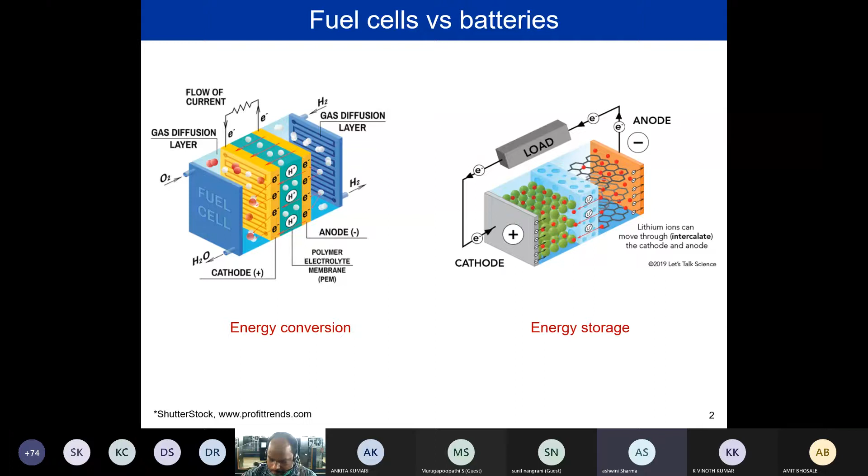If now I think of the actual applications, maybe hundreds of volts are required. Similarly, we require a lot of power to drive the real application. So then what we need to do in case of the fuel cell, we have to stack them, right? So here a single cell is shown, and a stack is shown here. This can be a bipolar stacking, or there could be some other architectures also for stacking the fuel cell.

Similarly, on the batteries, we have multiple cells. A single cell definitely will not be sufficient for our application, so we need to put a lot of cells together. I think Prof. Akhil has talked about this regarding battery module design and battery pack design. We have to put a lot of cells in series and parallel to make the battery modules and packs, and that's how we can really power the real applications around us.

So for both fuel cell and battery, we have to go all the way from the electrode level to the application level, and there are a lot of engineering challenges in between. It is not sufficient to work only on the material level or the electrode level. Rather, a lot of system engineering is required when you take a single cell to the application level. That is another interesting research area people are working on.

Now the focus of this presentation is the applications. When we think about an application, there are two major quantities: one is the power and the second is the energy. How much power do you require for a particular application? How much energy do you require? So what is the difference between power and energy?

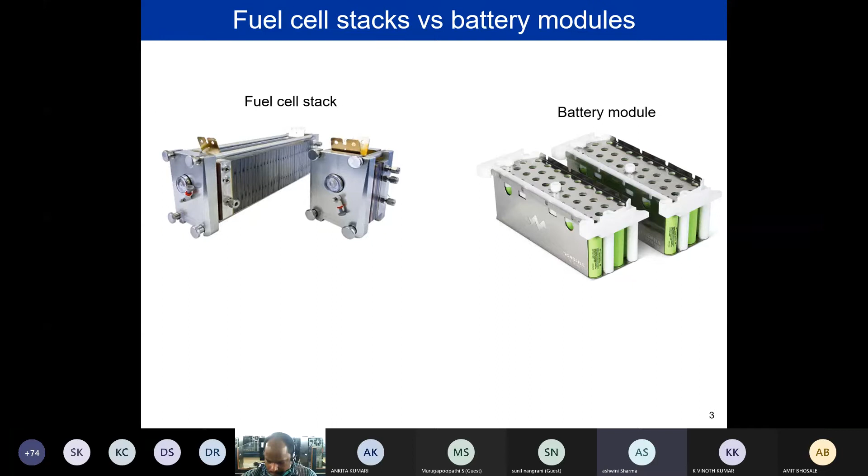Let's take the basic definition of power and energy. Energy means capacity to do work, the total capacity to do work. And power is the rate at which the work is done.

In context of, say, an electric vehicle, the total distance that the vehicle can cover will translate into the total amount of energy required. How much total energy you should have on board to go up to a certain distance.

Similarly, power comes into play because you need to accelerate the car. How much acceleration you can achieve in a minimum time gives you how much power you should have.

Now in terms of fuel cells and batteries: in context of fuel cell, energy means the amount of fuel that you have stored on board. In context of batteries, it is the amount of storage material you have.

Power means how much surface area is available for electrochemical reactions. Electrochemical reactions are surface reactions, so if you have higher surface area, higher current can be generated, and that's how you can convert it into more power.

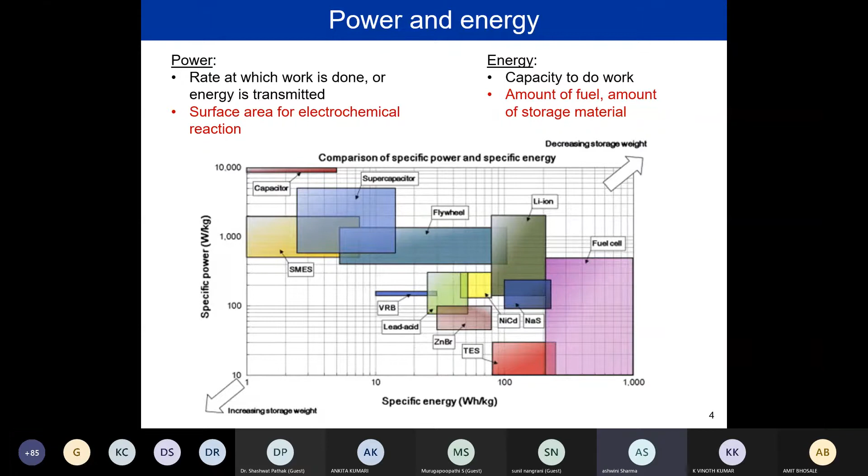Now coming to an application, if I want to run an application for a longer time, I don't need a larger stack. Rather, I simply need a larger tank, right? So there is no dead weight here. No dead weight will come up if I increase the energy. So that is the beauty of fuel cell.

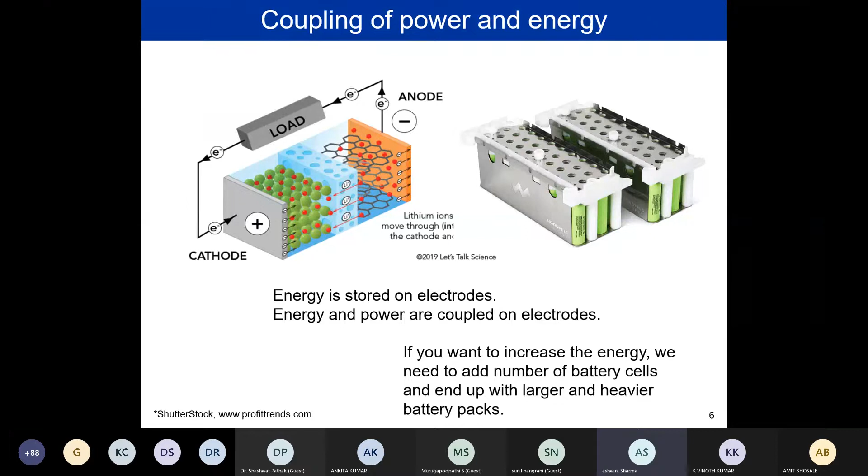I hope this discussion is enough for now when we are going to the application level. So let us think about what applications we can think of for these power sources. Definitely, whenever we think about these electrochemical power sources, the first application that comes to mind is electronics, your phone, your laptop. All these portable electronics require a power source, and the electrochemical power sources, especially the batteries, fit in very nicely, right?

You come to portable power tools. These kinds of tools are required maybe in industry, maybe in your garden, in your household tasks. Not always will you have electricity at your disposal. So in that case, maybe battery and fuel cell can do the job for you.

And if you come to defense and military applications, both fuel cells and batteries are being used or explored for applications such as portable systems, small vehicles, communication in the military, marine applications, for example, submarines and other underwater vehicles. Similarly, unmanned aerial vehicles. All these applications we have.

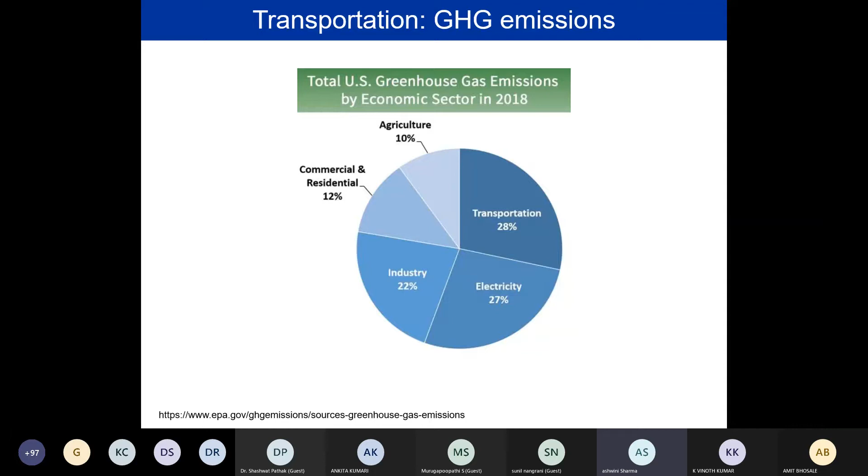So now comes a very important question. We think that electrochemical power sources, both fuel cells and batteries, can jump in for transportation. But the most important question is: fuel cells or batteries, which one? Companies like Honda, Hyundai, Toyota are producing fuel cell vehicles and also battery vehicles. In short, I will call one the fuel cell electric vehicle and the other the battery electric vehicle. Which one should we choose, FCEV or BEV? That is the question of the hour.

All these automakers are actively working on these vehicles, but there is no agreement on whether we should go for FCEV or BEV. Some prefer battery electric vehicles, while others think hydrogen fuel cells are the champion for zero emission transportation. So that is the question.

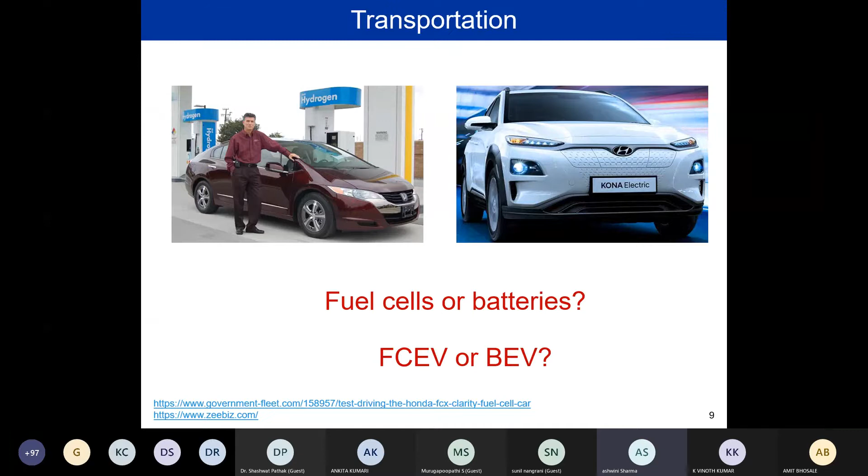Now let us explore both modes of transportation, battery and fuel cell, starting with well to wheel. The well is our crude oil source, the crude oil wells, and from there all the way to the wheels.

So gasoline is taken from the well, and then we are refining the gasoline, and you are converting it to suitable fuel, going into the fuel filling station, and then it is coming to the fuel tank of your car, and finally it is converted to rotational energy for the wheels. That is happening in the internal combustion engine that we are currently driving.

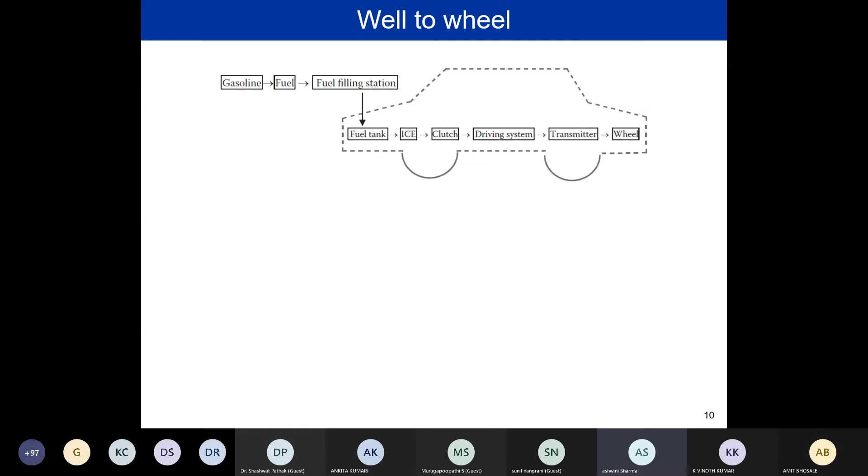Now what will happen if I have an electric vehicle? So let's start with the battery electric vehicles. In the battery electric vehicle, we will definitely be starting with some form of energy. Currently, the electricity that we are using in our homes is being produced by gasoline or coal, right? But in the future, we are thinking of renewable energies: solar, wind, hydro, atomic.

So here, once we have the electricity, in the case of the battery electric vehicle, we simply put in the charger and the energy is stored in the batteries, and later we can use it for driving the vehicle. So it has a simpler structure as compared to fuel cell.

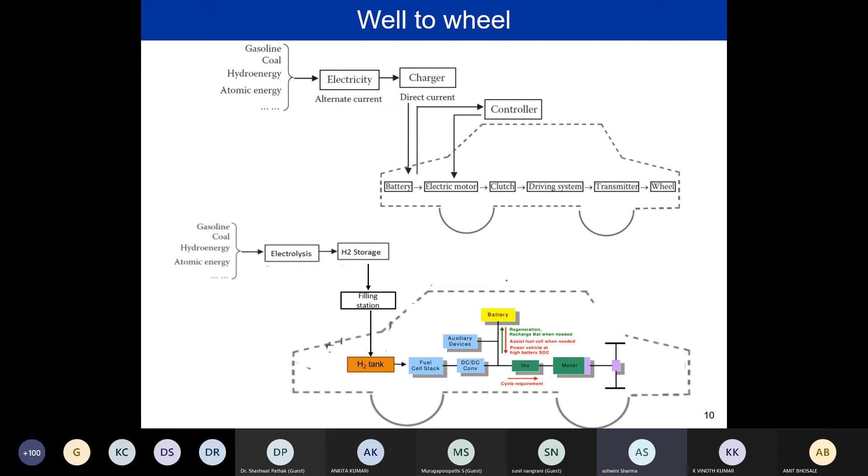If you see the fuel cell, this happens. First you have the source of energy. You do the electrolysis, because we need hydrogen in the case of fuel cell. So we have electrolysis for the production of hydrogen, and then hydrogen storage, because we know that we definitely have to compress or liquefy hydrogen, otherwise it's huge in volume.

You definitely have to transport this hydrogen to the filling stations, and from the filling station it will come into your car's hydrogen tank, right? And then you have the fuel cell stack, which can convert it into driving energy for the wheels. You see that the battery is still an integral part of fuel cell electric vehicles. And why is it required? Because

we have some issues with the fuel cell during startup, and also if there is energy from regenerative braking, that can be stored in batteries, right? So it can assist the fuel cell whenever needed, especially during startup.

If we talk about the power requirement, the battery has a higher power density, so it can provide you higher power. So if you are in a sudden acceleration mode, maybe the power drive shifts to get the energy from the battery. So that's how we can see the battery is an integral part even in fuel cell electric vehicles. So this is how to think of the architecture, or the well-to-wheel arrangement, for battery electric vehicles or fuel cell electric vehicles.

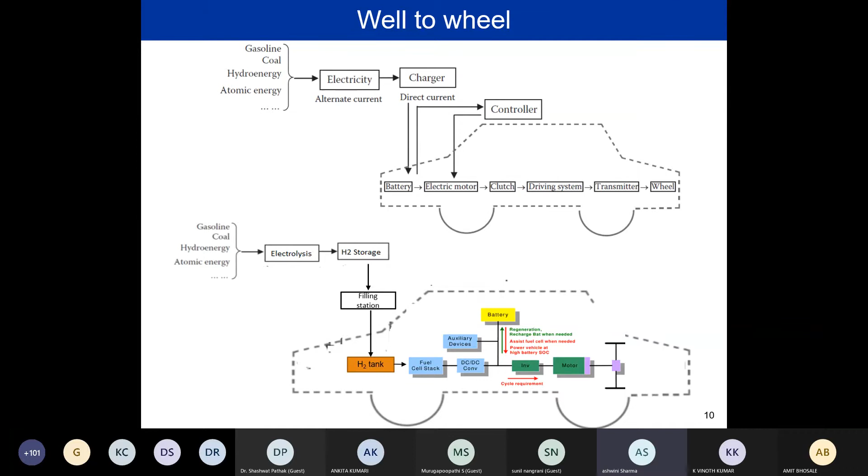Let us think about this before we make any conclusion. Let's look at the similarities of the battery electric vehicle and the fuel cell electric vehicle. They share many similarities. Most importantly, they are based on the electric powertrain; you need the same powertrain for both of them. Electricity is the output of both power sources, and that rotates the motor to roll the wheel. And both of them have minimal moving parts,

thus they do not create any noise or disturbance for the driver. And with EVs, we can certainly imagine zero pollution, at least on the road. Certainly the pollution will be there in the power plants. Why? Because you need to produce the electricity to charge the battery, or you will be producing the hydrogen. Hydrogen, as of now, we are producing just from steam reforming of fossil fuels.

Anyway, both fuel cells and batteries provide us the opportunity to couple them with renewable energy sources, and thus we can visualize truly zero-emission transport. As of today, it's not completely zero emission, but in the future, when renewable energy sources pick up, we can think of zero-emission transport with both of them. That is the key point.

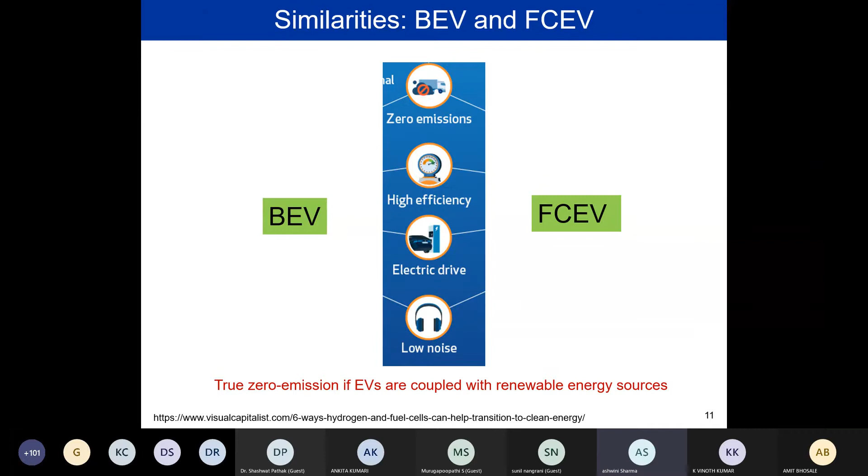If we do a full comparison, because we have seen only the similarities, and now see the differences also, this is how it looks. The battery electric vehicles you have on this side, and on this side you have the fuel cell electric vehicles. It is not noted, so maybe I can note it there. This is the battery electric vehicle, and this side is the fuel cell electric vehicle.

Okay, so you see that the advantage for batteries is, first, you have the high well-to-wheel efficiency; we are going to see how it is a high well-to-wheel efficiency. But the most important advantage that a customer can see is the low cost, right? If you go to the market to buy an electric vehicle as of now, you will see that the battery electric vehicle is much cheaper as compared to the fuel cell electric vehicle.

Right. Similarly, if you think about the infrastructure, that means if I want to charge the battery, I already have some infrastructure in the form of the household electricity supply, so that can be used for this purpose. But as compared to battery electric vehicles, fuel cells suffer on these two fronts. First of all, it is definitely more expensive than the battery electric vehicle, and secondly, we don't have the required infrastructure for fuel cell vehicles.

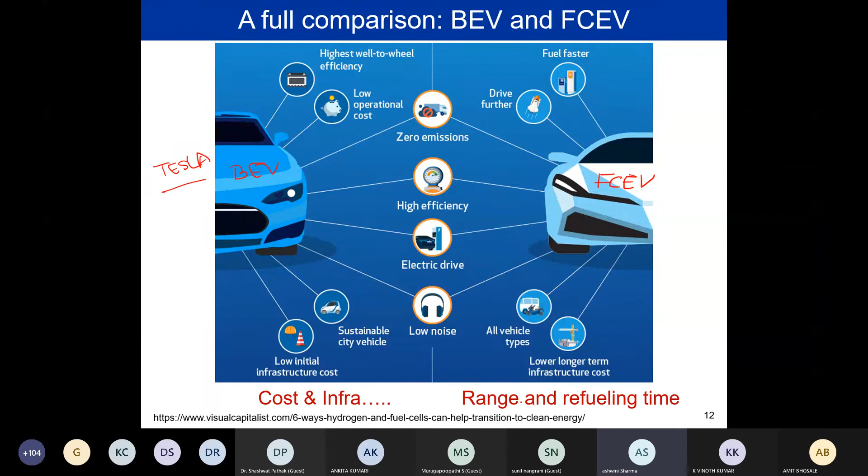Now the question is how the cost and infrastructure is better for the battery electric vehicles, and similarly, how this is better for fuel cell electric vehicles. So let's start. First, we look at the well-to-wheel efficiency again. There are a lot of differences between battery electric vehicles and fuel cell electric vehicles, and they have their own challenges. But when we think of zero emission vehicles, we can visualize both fuel cells and batteries. So let's look at how it is possible with either lower or zero emissions, starting with lower emissions as compared to internal combustion based vehicles.

So here we can think of the scenario where fossil fuel is the source of energy. That is the current scenario. So here it is shown how much energy remains if I take 100 joules of energy, right? Joule is the unit of energy. So if I start with crude oil of 100 joules, when I reach the wheels I'll be left with only 10 joules of that energy, and the rest, 90%, is lost, because first this crude oil is subject to refinery, right?

When you go to a refinery, a lot of operational and capital cost is involved. Refining is not for free. Once you have refined, you have to deliver it to the different filling stations. So it comes down to 70%, and the rest is lost, because we know that the internal combustion engine is not so efficient. The Carnot efficiency you have heard about, right? So there 60% of this is lost.

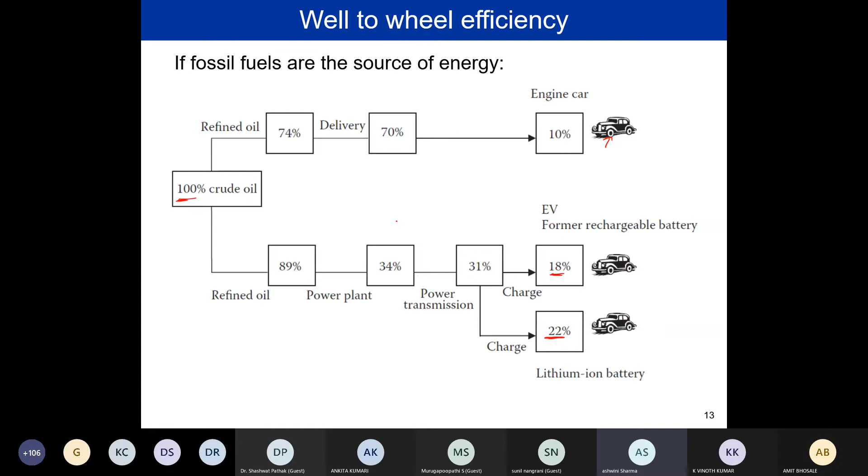Now let's compare battery electric vehicles and fuel cell electric vehicles on the similar concept. Let's see how it looks like. Here I'm comparing both battery electric vehicles and hydrogen electric vehicles or fuel cell electric vehicles.

For simplification, we are not starting from crude oil, we are starting from renewable energy. Let's say I have 100 joules of renewable energy. First it will go to transportation, we have to transmit the energy from one place to another. Some storage is also required because we have charging stations, so some energy is lost here. But almost 70 to 90% of the energy that we started with has reached the wheels.

So overall efficiency for battery electric vehicles is around 70 to 90%. It means about three-quarters of the electricity generated by the grid is actually applied to real propulsion, real movement of vehicles, real rolling of wheels. Now if you think of hydrogen powered e-cars or hydrogen powered electric vehicles, what happens here?

The losses are much greater here. Only 25 to 35% of the energy we started with actually makes it to the wheels. Why? Because an immense amount of energy was sacrificed or lost when we produced hydrogen through electrolysis. Electrolysis is the most common current method for production of hydrogen. Only 55% of that energy is represented by usable hydrogen. We started with 100, but due to electrolysis we lost a lot. Electrolysis is not as efficient as batteries.

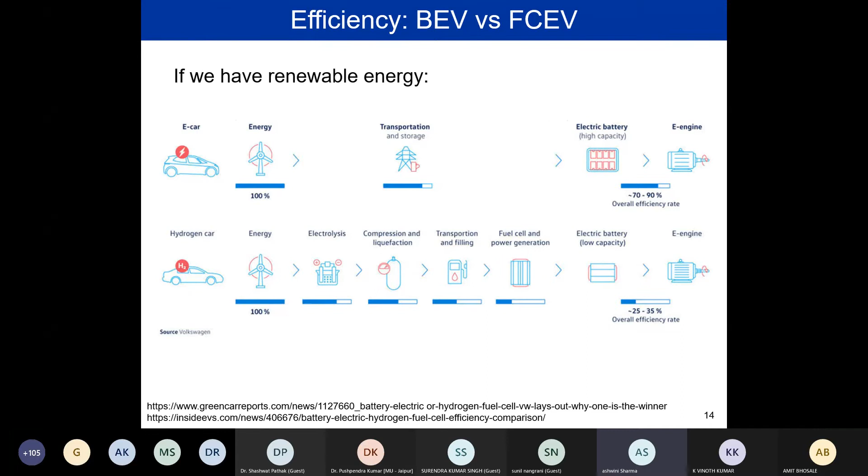And the reason is simple: we need more energy to produce hydrogen as compared to electricity and charging. So that is one of the biggest drawbacks of fuel cell electric vehicles—the production of hydrogen is not so efficient, and even when we convert hydrogen in the fuel cell, that is also not an efficient process. Efficiency is definitely a concern if we compare fuel cell electric vehicles and battery electric vehicles.

Other drawbacks: the first is cost. If you are in the USA and want to buy a fuel cell electric vehicle, I checked the prices today—I had a guess, but wanted to quote exact prices. It is around 55 to 60,000 dollars for a fuel cell vehicle. For the same company, if I take Toyota and buy a similar vehicle, let's say a Toyota Camry, it comes to around 25,000 US dollars.

So you can see the price difference. How can it then compete, or how can you motivate a customer to buy the fuel cell electric vehicle? That is the biggest disadvantage—the customer first sees the cost. Similarly, from the customer's point of view, we don't have the infrastructure. It really does not exist at all, neither to produce hydrogen nor to compress, transport, or sell it. So even if you start, it would be much more expensive than the existing electricity infrastructure or the gasoline and diesel supply infrastructure.

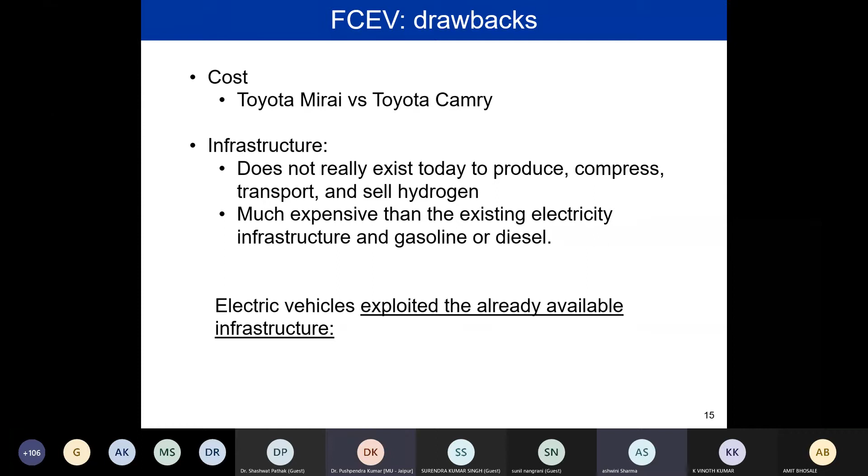Last year we've seen the cost of batteries come down significantly. And if the volumes of these batteries go up, we can expect the cost to decrease further. So scale of economies comes into the picture here—when you produce something at a larger quantity, the cost automatically comes down. This is what's happening with a specific kind of battery, the lithium ion battery, currently used in battery electric vehicles.

So back in 2015, prices were around $400 per kilowatt hour—remember, kilowatt hour is our unit of energy. So if I need 1 kilowatt hour, when I buy a battery, it would be worth $400. But if you think of 2018 or 2020, we are at less than half that. That is what's happening with batteries.

So if you go to the market now and buy an electric vehicle, it's not so expensive compared to fuel cell vehicles—it might be much closer to an internal combustion vehicle. Currently, comparing in US dollars, you can go up to around 30,000 for a battery electric vehicle. So that is good for the battery electric vehicle.

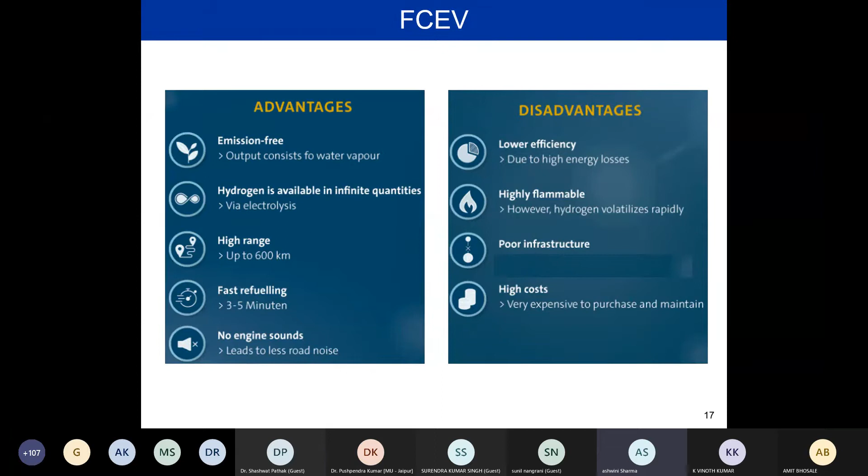So for fuel cell electric vehicles, we have the advantage of range—we've talked about how they can go for a larger range, because we can just fill the tank, and the energy density of hydrogen is so high compared to the battery. We also have the advantage of fast refueling. But all these advantages—range and fast refueling—are shrinking compared to batteries. And why are they shrinking?

Batteries are getting more energy dense and cheaper in the market. Moreover, for fuel cells we don't have a refueling infrastructure. So from every angle, when we think of the environmental balance sheet, things now speak more in favor of a battery powered vehicle if you think of passenger cars.

The battery technology is mature in the form of lithium ion electric vehicles. Although there are challenges, it is still a mature technology and ready for the mass market. If you see the number of battery car models, they are growing steadily, and more and more battery powered vehicles are coming into the market.

Driving remains affordable because the government is providing so much incentive. If you think of the cost per kilometer for a battery powered vehicle, it is much less. And it is available at almost the same price tag as compared to the combustion engine models, whatever the models.

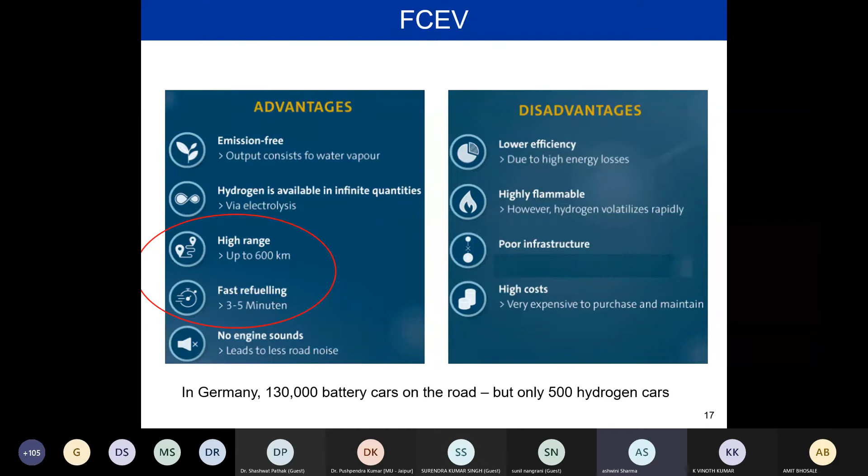So now, still, even though we have this clear-cut picture, both the automobile manufacturers and some countries are still researching and still pushing fuel cell electric vehicles. There should be some reason, right? Nobody is a fool if they are investing their money.

So Honda, Hyundai, Toyota - they are strong advocates of fuel cell, even today. All of them are selling fuel cell vehicles. If you think about the US - we cannot think about India in today's date - but all of them are selling fuel cell vehicles in the US.

Note this: Honda and Toyota do not even offer a true electric model or true battery electric model in the US. They might be offering it in other countries, but in the US they are not even offering the battery electric vehicle. They are still pushing the fuel cell electric vehicles.

Similarly, countries like Japan are giving higher subsidies on fuel cell electric vehicles. They are pushing fuel cell. If you have heard about the Japan Olympics, they had these fuel cell powered shuttle buses. That is what Japan is doing, and they are thinking of coming up with 160 fueling stations.

Japan is an island, so they can think about this more - because now you have to think more about customer needs. Since Japan is only an island, if they have 160 fueling stations all around, then they are done with the infrastructure.

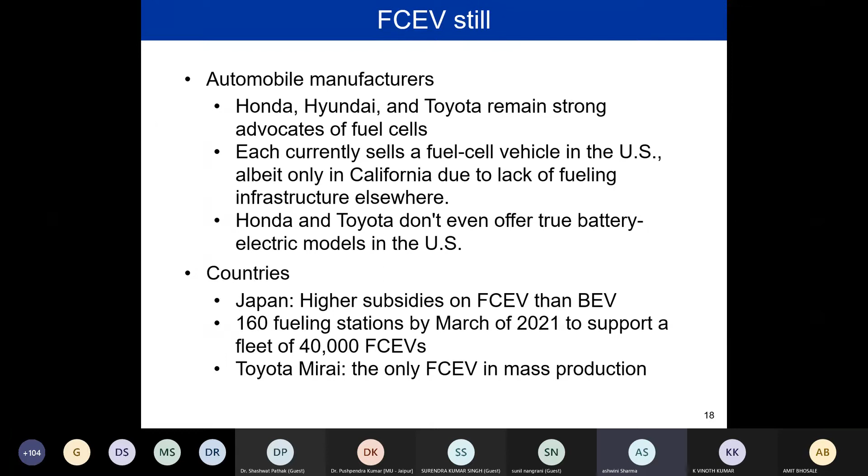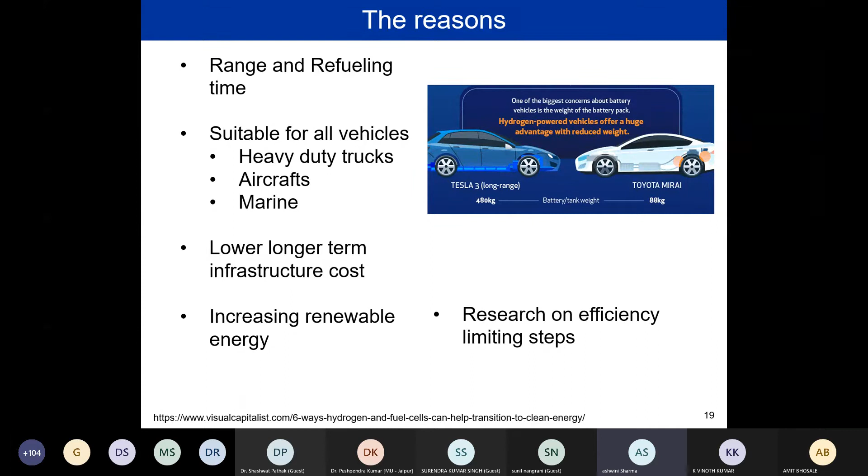The first reason I already summarized here, that it depends on your needs. It depends on your demography, where you are. Second thing, it depends on your need, whether you have a passenger car, or, as we will soon be painting this picture, whether you have a heavy transport vehicle. So these are the reasons that we are still pushing the fuel cell electric vehicles. The first important one is definitely the range and refueling time.

So hydrogen definitely has a future, right? Maybe not in the passenger cars, but in other applications, like it is definitely suitable for all vehicles here, because if you have heavy duty vehicles, the energy consumption per kilometer will be much higher.

So for a passenger car, maybe I'll be writing here some figures. For a passenger car, it consumes maybe 150 watt hour per kilometer. But if you think of a heavy duty vehicle like a truck, approximately, and these are approximate figures, you'll be consuming 2000 watt hour per kilometer.

So if a battery is driving this passenger car for maybe 150 kilometers, it might only drive maybe 30 kilometers for this heavy duty vehicle. So then, will we be putting more batteries on? No, that cannot be the solution, right? We will be seeing that. So these are the basic reasons why we are still optimistic about fuel cell electric vehicles.

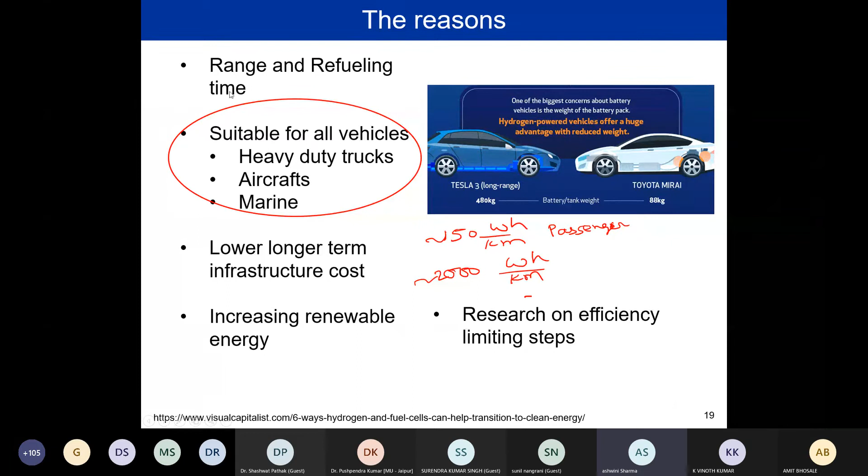And if we can overcome the other efficiency limiting steps like electrolysis and the compression and liquefaction of hydrogen, maybe we can again push hydrogen electric vehicles. So that is all we have to take into the picture. But the most important, as I said, is the range and refueling time. So why is the range of this fuel cell electric vehicle higher? Let's dig a little bit deeper.

That comes, I think, from the energy density. Initially we talked about a similar figure, that in the fuel cell we have energy density in the range of 1000, whereas in batteries we have only in the range of maybe around 100. So that is the most important figure where fuel cells score better compared to batteries.

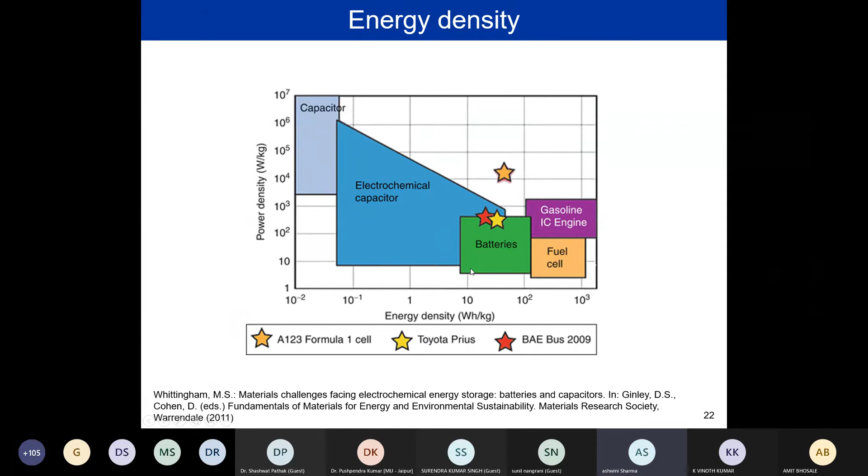The same is reflected if I show you the next picture. You can see that for a lithium ion vehicle, the energy density is around 100 to 150 watt hour per kg. Previously people were discussing only hydrogen, and the argument came that you did not take the fuel cell into the picture. But even if you take the fuel cell into the picture, the specific energy of the whole system is much higher, around 5 times higher than lithium ion systems.

So the numbers behind hydrogen are really compelling. 1 kg of hydrogen can contain approximately 33 kilowatt hours of usable energy, and that is approximately 3 times that of petrol and diesel.

And if you compare with batteries, the numbers are quite astonishing. I can write these numbers for batteries. You have 150 watt hour per kg for simple batteries, but hydrogen, we know, is 33 kilowatt hour per kg. So in watt hours, it becomes 33,000 watt hour per kg. So that is how hydrogen is an energy dense medium for the transportation or transfer of energy.

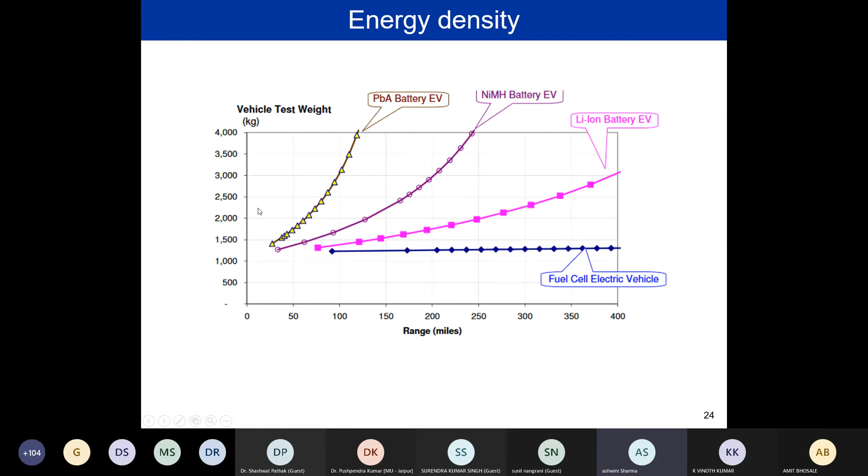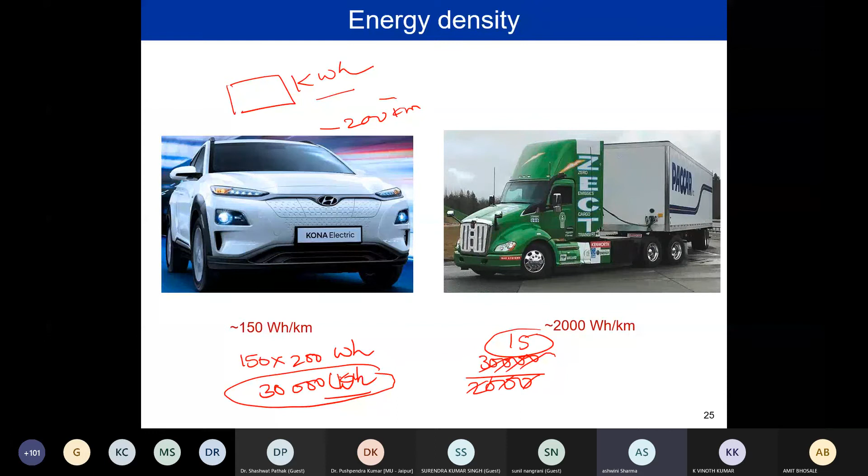So if I have this 30 kilowatt-hour battery for this system, how much distance can it travel here? 30,000 divided by 2000, only 15 kilometers. So the same battery that was driving this vehicle for 200 kilometers can drive this vehicle only for 15 kilometers. So that is where the fuel cell scores better than batteries: heavy duty transport, that is what we will be calling it.

We know that the movement of goods via trucks is increasing, and by 2040 there are figures that it will increase by 45%. If it increases by 45%, we can think of what level air pollution and greenhouse gas emissions will reach. Heavy duty vehicles are currently the highest contributor to street level pollution. They are only 2% of vehicles, but they are responsible for 23% of the emissions. They are also the major oil consumers.

In transportation, we are always thinking only about passenger vehicles. We were never thinking of these heavy duty vehicles. So here maybe we can have some avenues for the fuel cell. For passenger cars, we have concluded that maybe batteries are the way to go. But what about heavy duty transport? That's where maybe fuel cell can score better. So we have to think about this.

So batteries will not be ideal for heavy duty truck application. Why? The first is the recharging time. Recharging time definitely is a handicap. If you have a battery-only solution, it will be a handicap for them. It will take much more time. Simply, if you are out of fuel, you will go to the filling station and refuel.

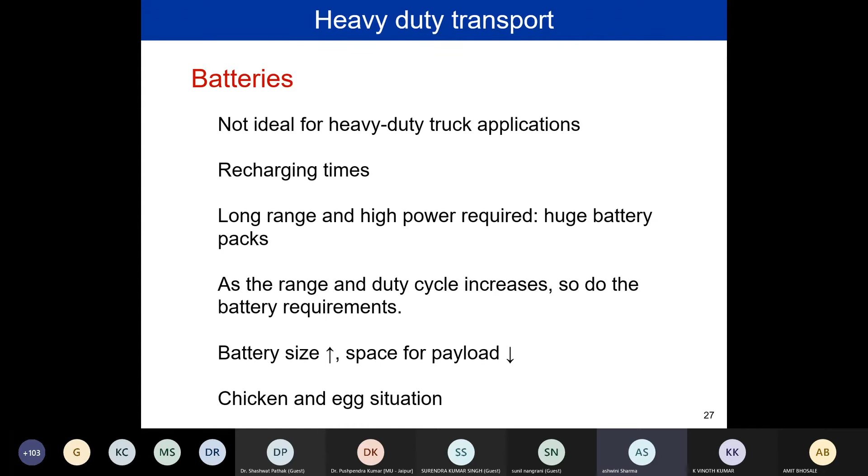So this is kind of a chicken and egg situation. If you want to transport more goods or heavy loads, then you need larger batteries. But with larger batteries, you don't have the space, or again the load on your vehicle is going to increase. That is the situation when we have battery-powered heavy duty transport.

But fuel cell transport, although it has not taken off for passenger cars, might have potential for heavy duty transport. In a fuel cell truck, we can replace the diesel engine with a fuel cell hybrid system. As I said when we discussed powertrains for fuel cells and batteries, it will be a hybrid system; you will need batteries. This hybrid structure can maximize the benefit and performance of the fuel cell in heavy duty application.

We know that 1 kilogram of hydrogen has the same energy as 1 gallon of diesel, or 3 times if you think in terms of liters. This lighter weight contributes to solving the range and heavy load issues. With a fuel cell powered heavy duty vehicle, we can solve both: we can go for a longer range, and if we carry more load, I don't have to carry more and more weight, because I just need to fill hydrogen, and hydrogen is light. So the issues we have with batteries will not be here.

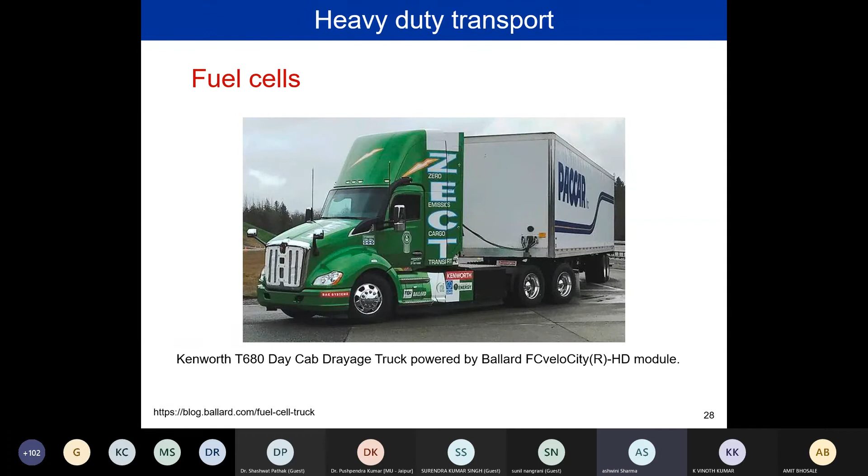Ballard is one of the most renowned companies in the case of fuel cells. So for other applications, we can also think of the fuel cell where maybe the batteries might not be suitable, like aircraft, right? Here we are going for a longer range, right? We need more energy stored on board. We cannot put more energy with the batteries, because then the dead weight is going to increase on our application.

So this point about the larger battery can also be applied to marine and aerospace applications. Hydrogen is a light and energy dense fuel, so the amount of cargo that can be carried in relation to the vehicle's fuel weight is much greater than that of a battery electric system of similar weight. Also, fuel cell allows for the availability of the maximum power at all times, as long as you supply the fuel.

But in case of battery, what is happening? It depends on the state of charge. When the battery is maximum charged, the power is the highest. But as the battery is getting discharged, the power that you can get from the battery is going to decrease.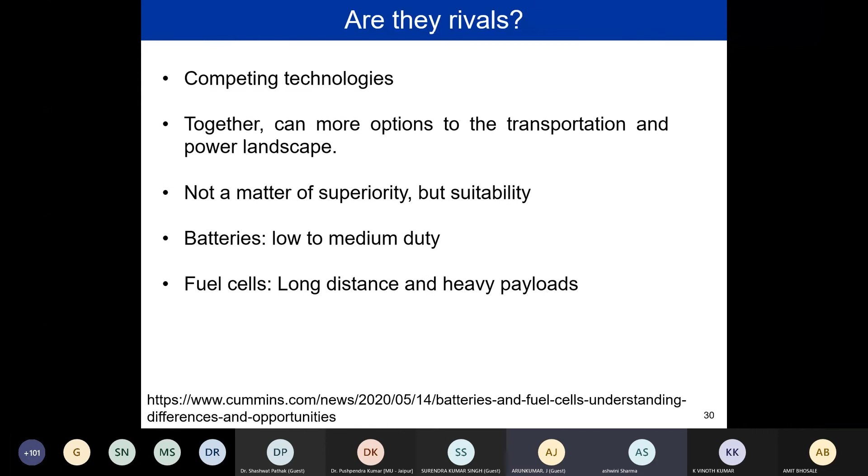And also one more thing regarding the energy, that 5,000 psi. Yeah, 5,000 and 10,000 psi. That's such a high pressure. It will not be feasible, at least for the Indian market, because to have such a high pressure hydrogen system is not easy. Definitely. With that slide, it was not our objective to show the practicality, but more the energy density. Let me go back to that slide, probably that may clarify.

What do you think of nickel metal hydride batteries? Nickel metal hydride has been used for a long time in the Toyota Prius. So is there any scope, for those looking for an alternative to lithium ion, will nickel metal hydride be a better candidate? I think the answer is in front of you, if you are seeing the screen. I don't want to comment much on this. I'm just wondering whether India has some good source of nickel metal hydride.